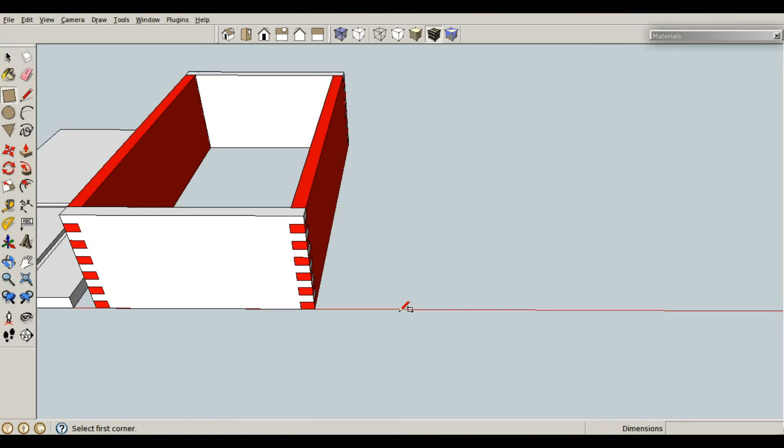Well, we made a box joint real quick. Can we make a dovetail real quick? And the answer is yes, using the exact same principle. So, R for rectangle, and let's draw our line, or our side piece here. And that was 0.75, comma 20, enter.

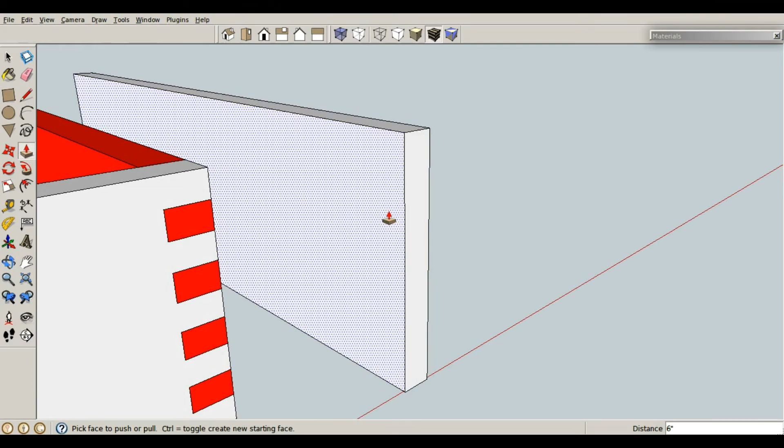P for push-pull. Let's pull this up, just referencing off of this, 6 inches tall. And before I make this a component, I'm actually going to do a little bit of drawing on it. So T for tape measure, and I'm going to drop a guideline that is 0.5 inches away. And I'm going to drop another guideline that is 1 inch away. I'm actually going to draw my pins and remove them on my tail piece, if that makes sense.

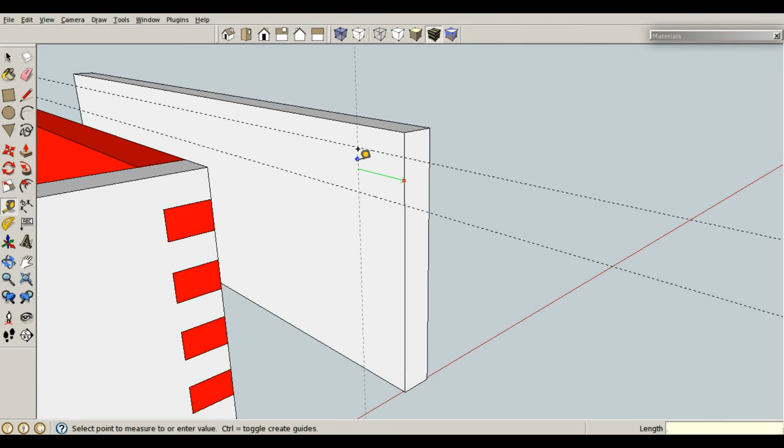Let's draw a guideline back into the piece for the depth of our dovetails, and that is the same distance as our thickness, which is 0.75 inches. Enter. So if I was to just use my protractor here and make another guideline from here and say we're making 15-degree dovetails. I've never made a dovetail in my life, so I don't know what the standard is, if there is a standard, but we're using 15 degrees here. I'm going to do the same thing from this side, going up. And line, I'm just going to draw my little cutout here.

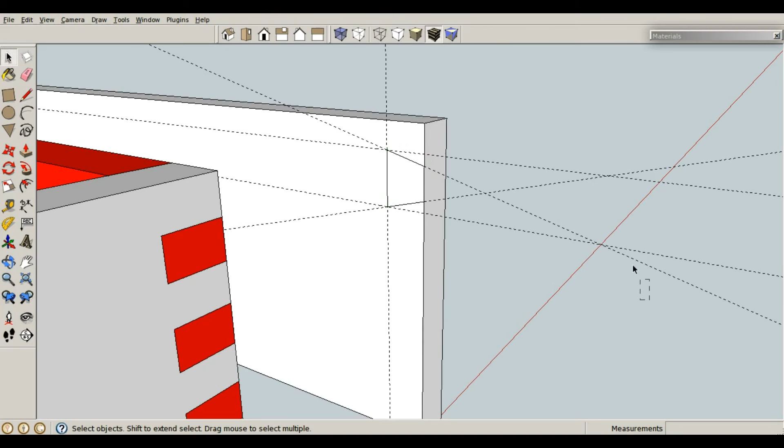Now I can delete all of my guidelines. I really don't need any of them. And I'm going to use a window to only select my dovetail. M for move, control brings up copy. That is 1 inch because it is 1 inch cut, and I want a 1 inch spacing, so let's drop another one 2 inches away. Enter. And just to copy that again, let's press X2, enter.

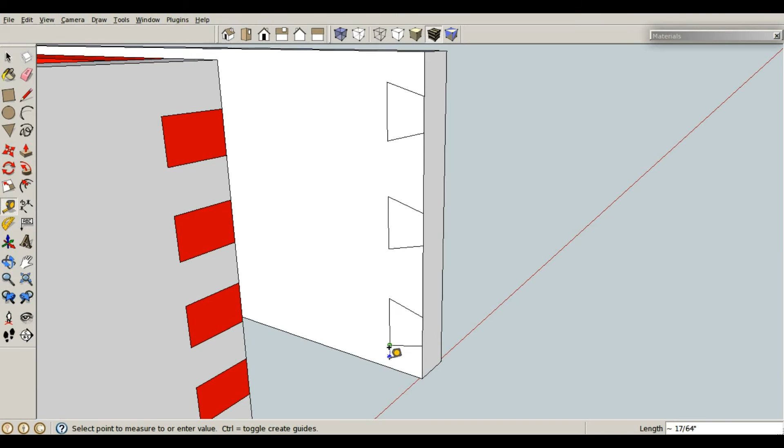So if I'm not mistaken, let's D for dimension here real quick, or T for tape measure. Let's verify that, yep, that is ½ inch. So I have a ½ inch here and a ½ inch here. P for push pull, and let's just push these out. Double click to repeat my push pull. And this is my tail piece, right? So spacebar, triple click, G for component, enter. I'm going to drop a little bit of color on here just to contrast again. So drop some red on there.

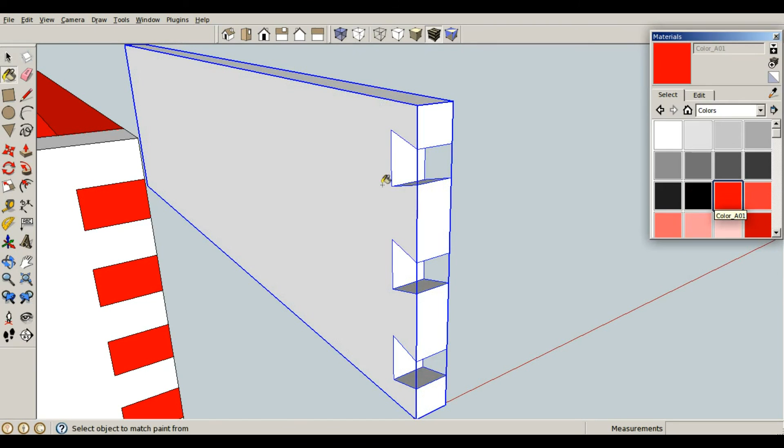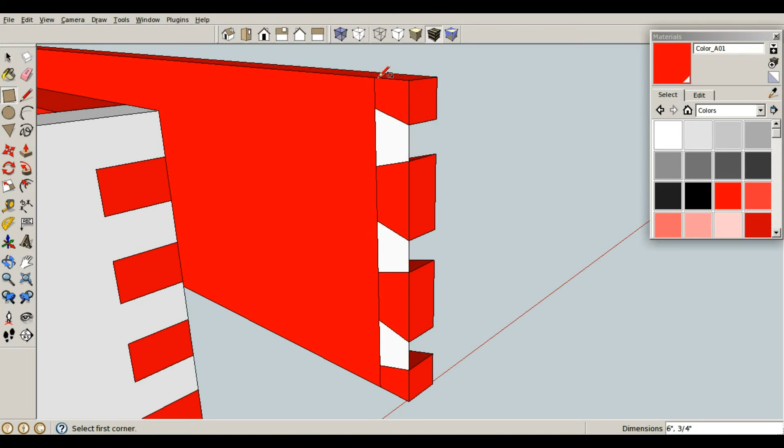And I'm also going to draw my next piece in place. So R for rectangle, and let's go up here. And you notice I don't know my width here. I could specify to my dimensions, or I could just simply put my mouse over here until that endpoint pops up, and it'll snap to that endpoint. So my width is exactly where it needs to be. P for push pull, and let's push it this way 12 inches. Enter.

Now, just like the box joint, this is model space. It is not a component. This is a component. So let's right click the component, intersect faces with the model space. Now if I move this out of the way, you can see that it transferred all my dimensions, all my geometry to the actual workpiece. So let's make sure we're messing with model space. P for push pull, and let's push this face all the way in. Double click to repeat, double click to repeat, double click to repeat, space bar, triple click to select all of my model space, G for component, enter. So now I've got a nice little dovetail joint.

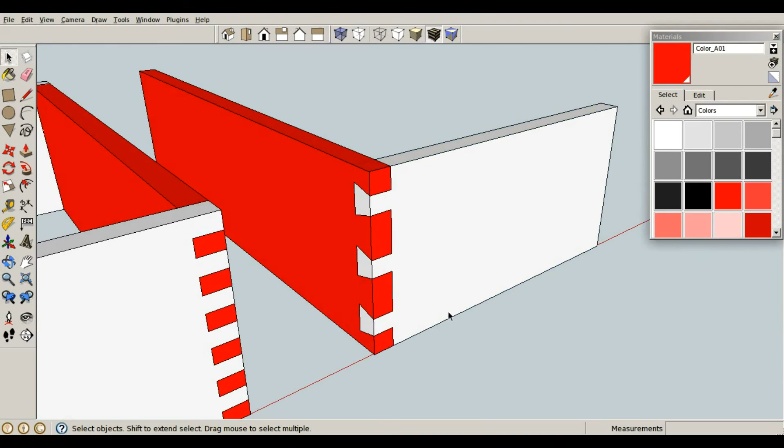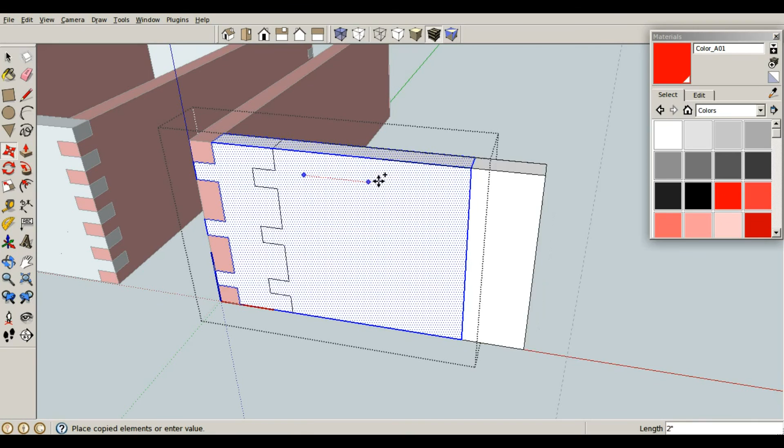And we want to copy our geometry just the same way we did in the box joint over to this side. T for tape measure. Let's set a guideline right where we want our geometry to stop. Double click to edit our part. P for push pull, and let's make some room for our dovetails. Space bar, triple click to select everything. M for move. Control brings up copy. Set one side by side. Right click, flip it along the red, that's the direction in which we dragged it.

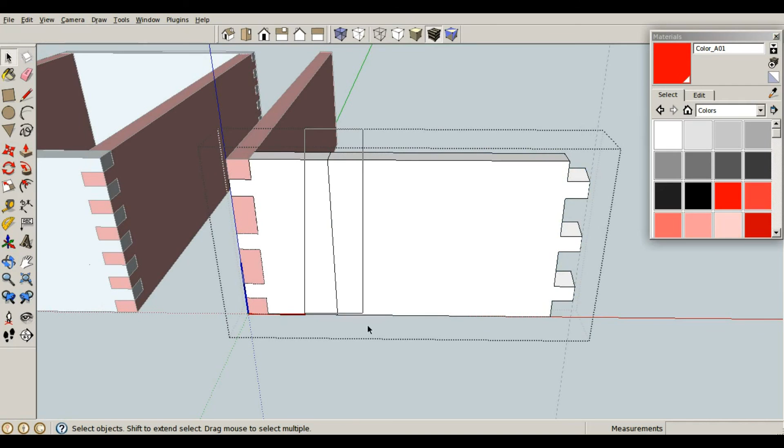And let's grab one of our pins and put it up against this line. Now we can use a window to select only these lines and delete them. Select only these lines with a window and delete them. Click outside, and now we have our pins over here. Let's delete that. Let's grab our side. M for move, control brings up copy, and let's grab one over here and drop it off over there.

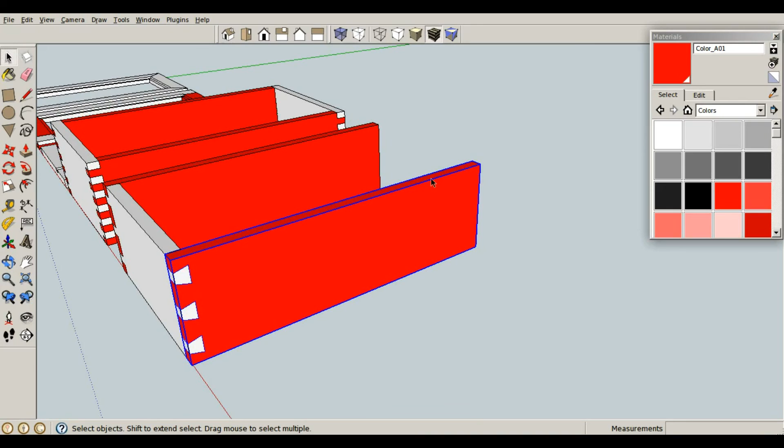How do we make the back? Well, we can grab this, M for move, control brings up copy, and let's go from front all the way to the back. Now, this is a dovetail joint on the back side, so we need to flip along the green direction in which we dragged it so that our pins are facing the correct way. So right click, flip it along the green.

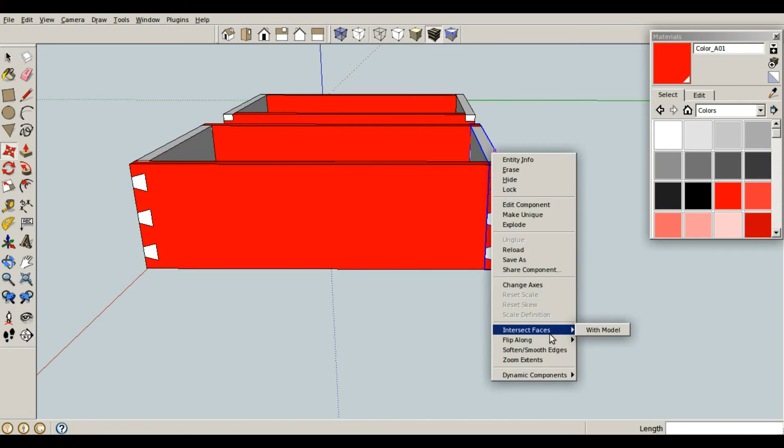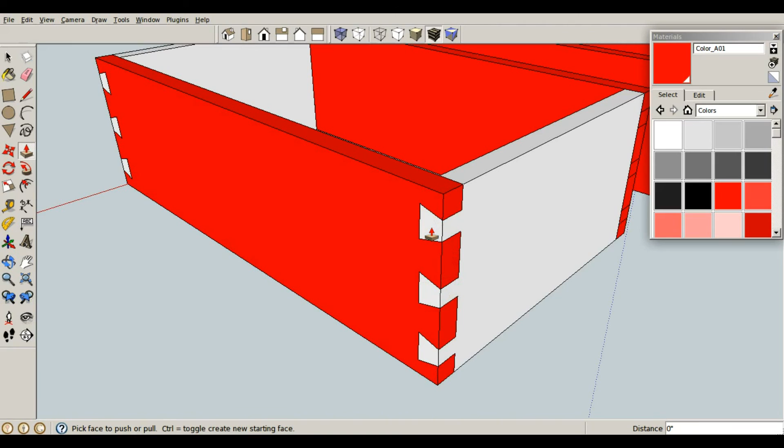And now we need to transfer this measurement over to this piece. Well, this is no longer model space. I can get it back to model space by just right clicking and explode. So now this is a component. This is model space. So if I right click my component, intersect faces with the model, now all my stuff is transferred to here, and I can P for push pull and just push out the area, creating my tails, or double click right there. Spacebar, triple click, G to make this a component again.

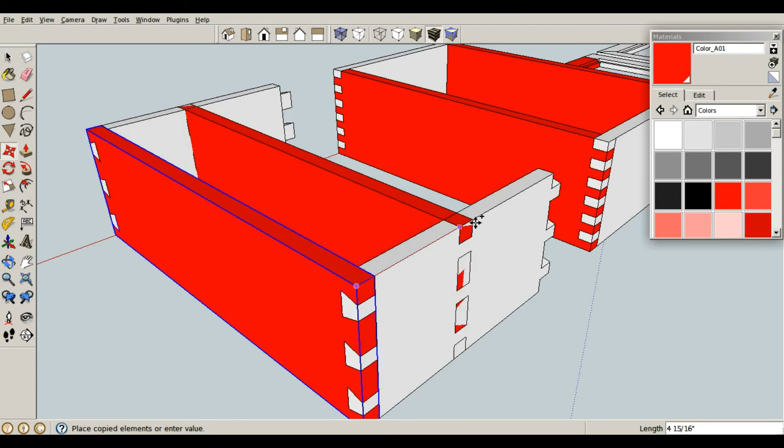Now I really didn't need to copy this when I did, but I actually did, so let's just go ahead and delete this first one. Select this because it has the tails on both sides. M for move, control brings up copy from here to there. So now I've got a four-sided box with dovetail joints all the way around. Exact same process with the box joints, except a different shape.

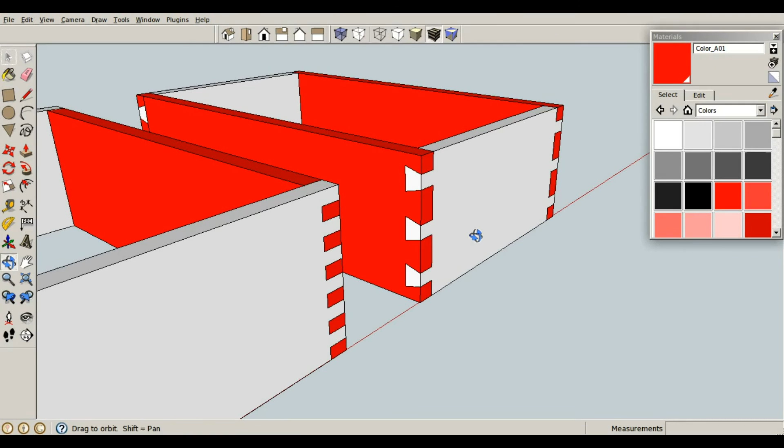Just for grins here, what about a half-blind dovetail joint? Sure, we can make those too. So let's go ahead and delete that piece, and R for rectangle from here, again referencing off of here. P for push pull, and let's go all the way to this back edge, and this time let's create some additional thickness up here. So 0.25, quarter inch extra.

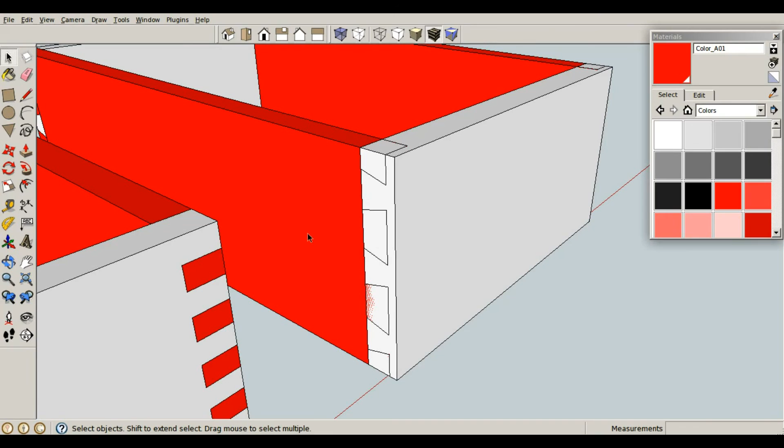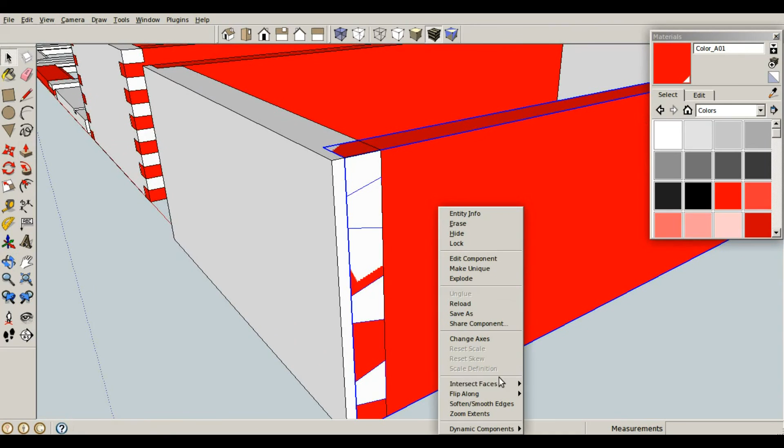So the same exact process really quick. I can right click here and say intersect faces with the model. This is model space. And now I can P for push pull and push out my space to create my pins. Double click to repeat, double click to repeat, double click to repeat. Same thing on this side really quick. I can right click and say intersect faces with the model. P for push pull, and let's push this in back to here, double click, and double click.

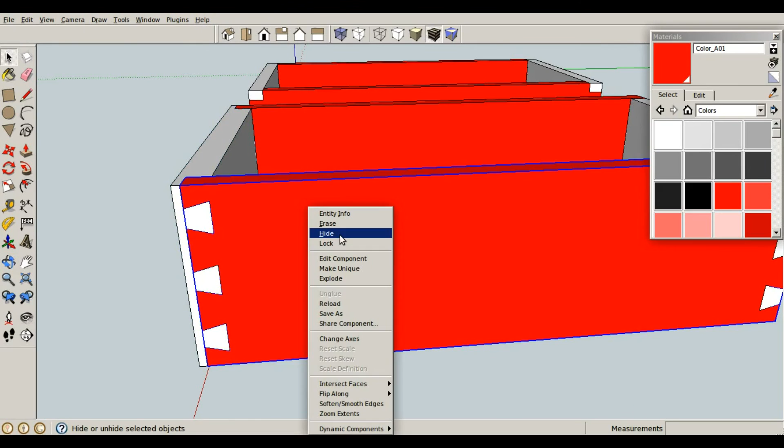So spacebar, triple click, G for component, enter. And if I was to just right click and say hide, you can see that I have a very easy and quick half-blind dovetail.